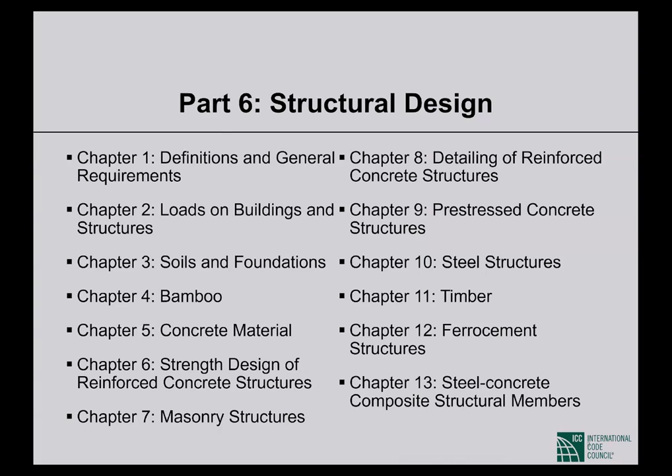So let's see what is there in chapter 1. There are many things, but I'll just emphasize a few topics. First, what is the definition of structure according to the building code? A structure is an assemblage of framing members and components arranged to support both gravity and lateral forces.

Basically, that part of a building, or a non-building structure, that carries the load is the structure. Building structures enclose a space and are used for various occupancies. When we have different types of occupancies, people may reside or use the building for different purposes.

That makes it a building, and the structure of a building is a building structure. Non-building structures, other than buildings, such as water tanks, bridges, communication towers, chimneys, etc., are non-building structures. Now, are non-building structures covered in the building code?

Yes and no. For example, even for the design of non-building structures, we use the building code to determine load, such as the seismic load. You use the zonation map even to design bridges or other non-building structures. And there are some tables related to wind load for non-building structures. So from that perspective, this is partly covered, but the details of design of non-building structures are not covered in the building code.

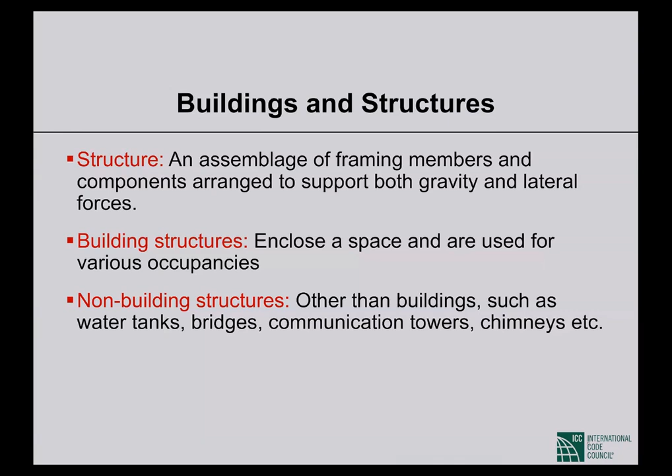Now, this is quite familiar to you. This is the occupancy. As I said yesterday, we categorize buildings in different ways. For structure, for the purpose of structural design, we categorize buildings in one way. For seismic design, we categorize buildings in a different way. For architectural purpose, we categorize in another way. For administrative purpose, we categorize. So there are different categorizations of buildings.

For structural design purpose, the most important categorization is this, although the name is very similar to the architectural categories. That is also called building categories on the basis of occupancy. And in structural design also, we call it occupancy category. Basically, this is risk category - how, if a building collapses, what might be the risk, what would be the consequence of the collapse. It is related to that, this structural occupancy category.

Now, you already know this, because it is similar to the old building code. The first one is low hazard to human life. That is, if a building collapses, if there is very little probability that human lives will be in danger, then that is low hazard. For example, a silo for storing grains, such as rice or sugar - so if it collapses, there will be economic loss, but there's very little chance that human lives will be in danger. So that is a low hazard building.

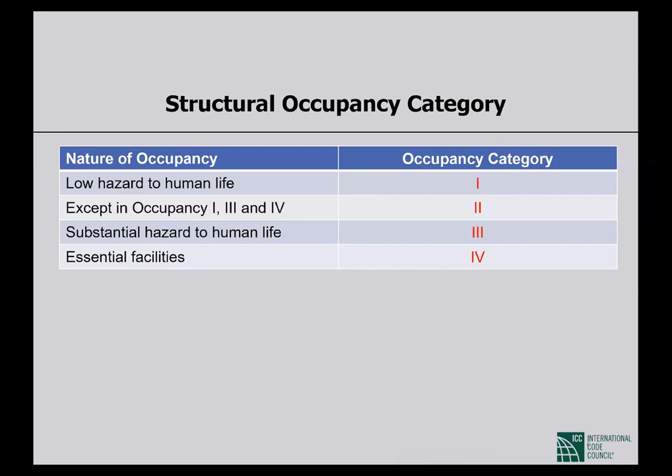Then what about the second category? All other buildings like residential buildings, office buildings, are called standard occupancy. They come in the second category. So I think most of you know about these categories.

So that is unchanged. Building basic structural systems - these are also mentioned in the previous version of the code too, but I found that many engineers are only familiar with the moment resisting frame system. They're not familiar with other systems. Now, actually, there are different structural systems.

The first one is very simple, the bearing wall system. That is like our old type brick buildings - the brick walls carry both gravity load and have a limited capacity to take lateral loads. Bearing wall system, but if it is properly designed, it is supposed to carry the lateral loads too. So bearing wall system, I think you are familiar with that.

Building frame system is interesting. Although the term frame is there, you may think that this is a beam column system. Yes, frame is there, but the typical beam column systems we are familiar with are actually moment resisting frame systems. So what is a building frame system? The frames, that is beam column frames, carry the gravity load only. The lateral load is completely carried by shear walls or bracings. So the shear walls or bracings are designed to carry the lateral load, and the beam column frames are designed to carry the gravity load. That kind of system is called building frame system.

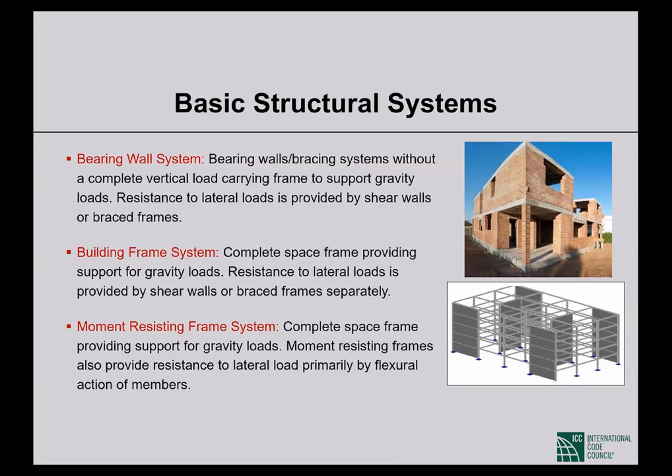So, okay, I have some animations.

We all know that the building code mentions 3 types of moment resisting frames: ordinary moment resisting frames, intermediate moment frames, and special moment frames. Most of you know about these classifications. These relate to detailing, that is how ductile the frame is, and what amount of inelastic deformation a frame can go through. Ordinary moment frames are not very ductile; they collapse after some deformation. Intermediate moment frames are somewhat more ductile than ordinary ones, and special moment frames are very ductile, so they can absorb a lot of energy during inelastic deformation.

We'll see some more details. Actually, Dr. Ghosh will give lectures precisely on these topics in later sessions in the coming weeks.

Dual system - I think many of you know about this. A dual system has both beam column frames and shear walls or bracings. The difference from a building frame system is that in a dual system, the beam column frames in a building also carry a portion of the lateral load, at least 25% of the lateral seismic load. If that is the case, we call that a dual system. There may be other special structural systems like tubular structures, tube in tube, and many other types termed special structural systems.

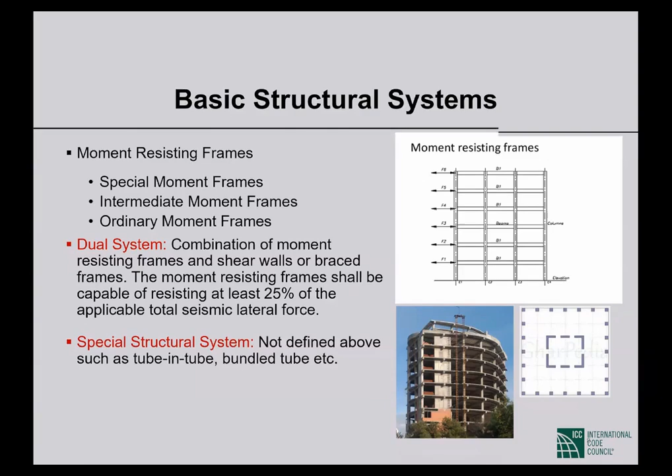Now, there is another very important aspect of structures: a building structure can be regular or irregular. Many things depend on this classification. So if we know what the irregularities are, then if a structure doesn't have these irregularities, it automatically becomes a regular structure. Now, what are the irregularities?

The irregularities are classified into two classes. One is called vertical irregularity, which we can see from elevations or elevational sections of a building. The other is seen from plan view, the top view of floors. If we find irregularity in floor plans, those are called plan irregularity or horizontal irregularity.

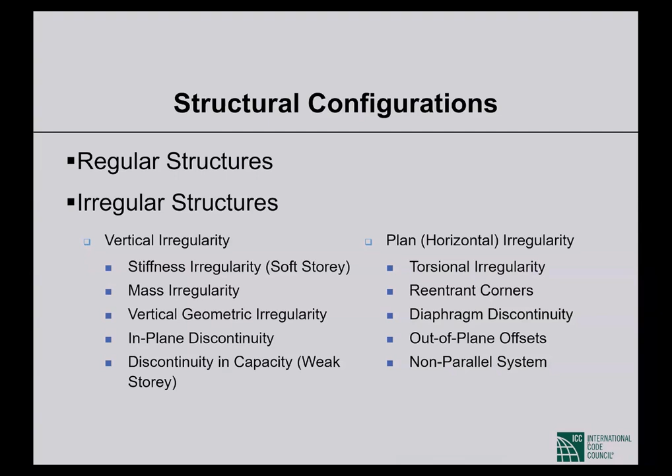Now let's see what the vertical irregularities are. There may be five types of vertical irregularities.

One is soft story - we quite often hear this term. Now, what is a soft story? This is related to stiffness. There are specific numbers like 70% or 80% - I'd encourage you to read the code for the exact number. If a floor's stiffness is much less than the stiffness of the adjacent floor, then that floor is called a soft story.

There are actually two types: soft story and extreme soft story. Not only is the adjacent floor compared, but adjacent two floors may be considered. We compare the story stiffness with the adjacent floor and the adjacent two stories. Please read the code for the exact definition.

What I want to show here is how a story can be less stiff than an adjacent story. One typical example is the parking floor or ground floor of an apartment building, where we don't have brick walls, whereas the upper stories do have brick walls. Brick walls are actually very stiff - they are quite weak in terms of strength, but quite stiff in terms of stiffness. So they may break quite easily, but it is difficult to deform them with a unit amount of force. That is the definition of stiffness.

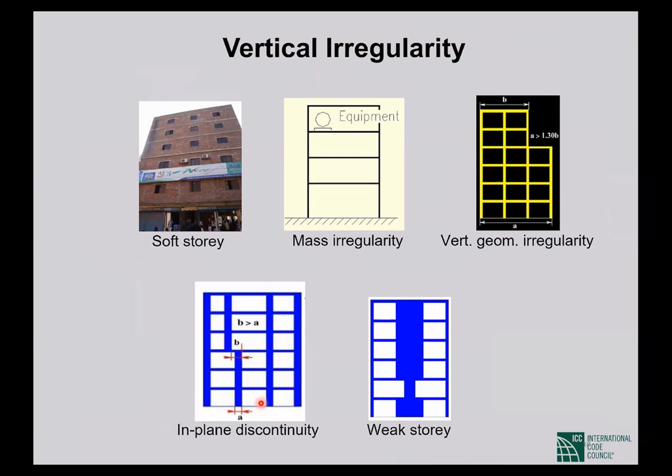So when the shifting is in a different elevation, this is called out of plane offset. And in the previous case, in-plane offset, you can see the shift in the same plane of elevation. So that is the difference.

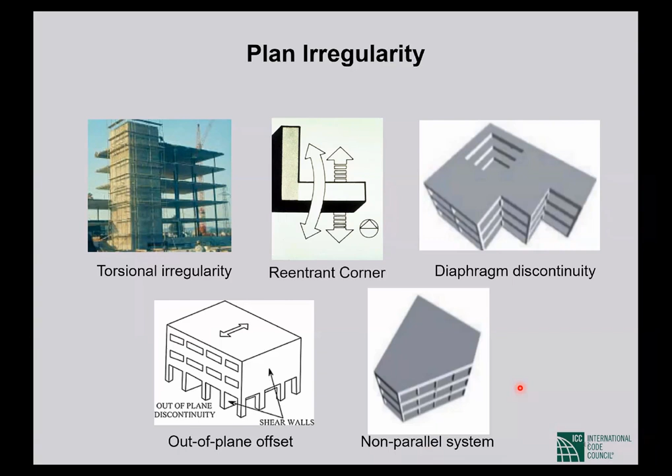So this is out of plane offset. And a non-parallel system, if the grids of frames are not parallel, then they're called a non-parallel system. So these are the irregularities that we have to be very careful about.

Now, why do you need them?

We'll see later. Now, another important topic included in chapter 1 is related to drift, allowable drift, serviceability. So the story drift that may be allowed depends, not for the seismic case, but for other types of loads. For all other types of load, we can allow this much inter-story drift, simply story drift. That is the drift between two floors divided by the story height. This much drift we can allow.

It depends, you can see, on the period of the structure. I hope you understand what we mean by the period of the structure.

I hope you all know about this, but still I want to mention that by the period of a structure, we mean that every structure has its own period or periods, every structure has a fundamental period. Fundamental period is that if a structure is, say, pulled in one direction, and if we remove the pull, then it vibrates. Then the time it takes to come back to its original position or to make one cycle is called the period of that structure. Very simply, if I pull a structure in one direction and remove the force and make it free, it vibrates without any force, goes to the other direction because of vibration and comes back, and the time required to make one cycle is called the period of the structure.

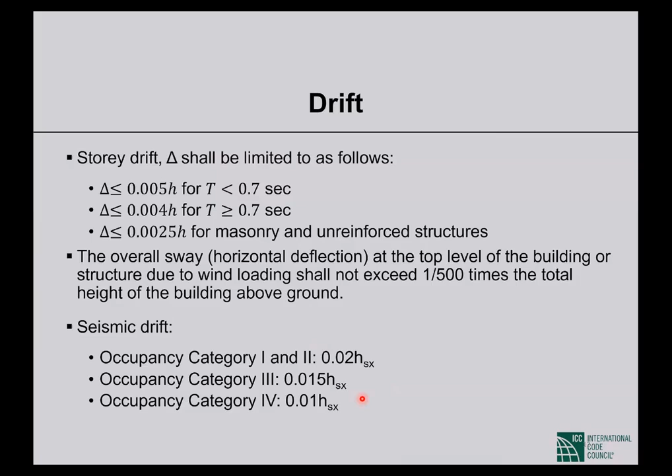Now, this is something that is quite often overlooked. That is in this chapter, chapter 1. It is related to design documents - when we submit a drawing for approval, what are the documents we are supposed to submit? In case of Rajuk and other development authorities, they follow the building construction rules, like Imarat Nirman Vidhimala. So in the Vidhimala, there are prescriptions for what has to be submitted. But according to the code, these documents have to be submitted.

So those in the PWD and Rajuk, I plead to you, please show this to the Imarat Nirman Vidhimala committee, so the rules in the Imarat Nirman Vidhimala do not conflict with the building code. The documents that are supposed to be submitted during submission should be similar, both in the building code and Imarat Nirman Vidhimala.

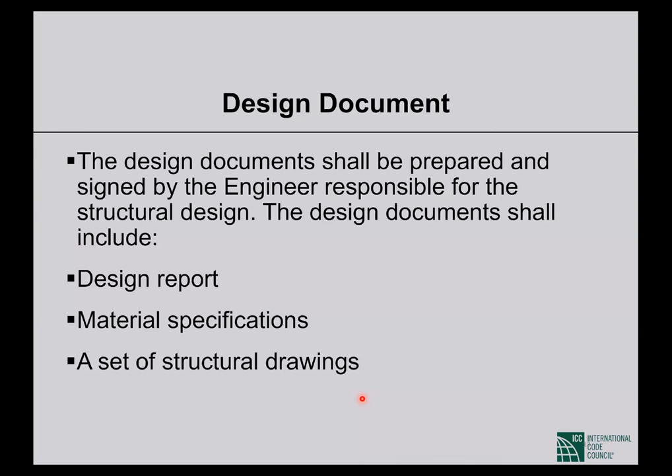So what are the documents that are supposed to be submitted? A design report, material specifications, structural drawings, mention of BNBC - for example, now it has to be BNBC 2020 - name of other reference standards, a drawing of the complete mathematical model. What do you understand by this?

Let me give an example. In order to understand the effect of the soft story building, we need to model the brick infill walls. So how can we model? We can model it in many different ways. For example, we can model it as struts. If we do that, then in the drawing of the mathematical model, the brick walls should be shown as struts instead of walls. So that is the mathematical model.

Methods of structural analysis and results of the analysis. There are different methods of structural analysis. We'll see, for example, to consider earthquake loading, what are the different methods of analysis. So which method of analysis is followed should be mentioned, and results of the analysis.

Methods of structural design, including types and strength of the materials of construction, reference of the soil report, statement supporting the validity of the above design documents with date and signature of the engineer responsible for the structural design. So it must be an enlisted engineer who can sign.

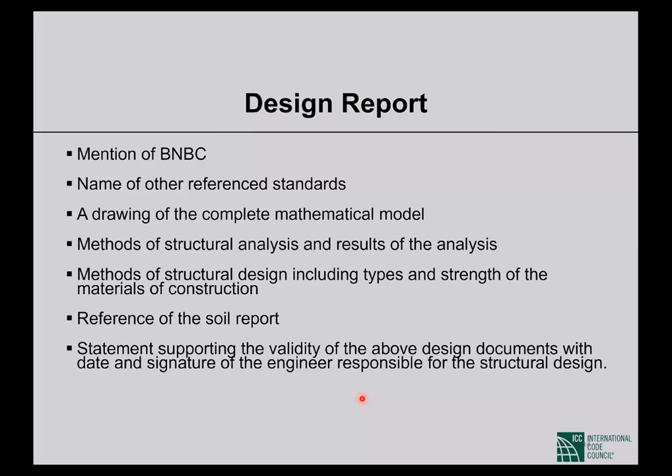In addition to that, in the structural drawings, what should be there? It is mentioned sheet by sheet, what should be there in the first sheet, what should be there in the second sheet. That is interesting. So we should all follow these guidelines.

In the first sheet: identification of the project, reference to the design report, date of completion of design, identification and signature with date of the engineer responsible for the structural design.

The second sheet shall contain material specifications, specified compressive strength of concrete at stated ages. For example, we need the 7-day strength of concrete so that we can decide if we can remove the props or not, things like that. Or in case of pre-stressed concrete, that is very important, when we can jack the concrete.

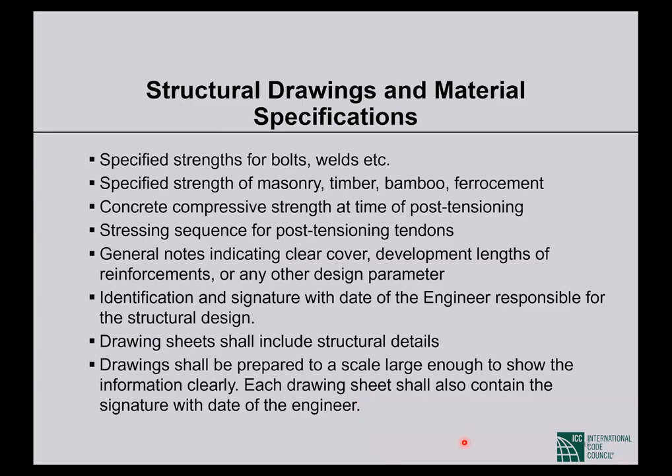And then drawing sheets shall include structural details. Drawings shall be prepared to a scale large enough to show the information clearly. Each drawing sheet shall also contain the signature with date of the engineer. So this is quite detailed, all the information, and we should follow these guidelines.

So that was all about chapter 1. I took a lot of time covering chapter 1, but I think this chapter is very important, though it is not read widely. But this is very important - there are many more important pieces of information in that chapter.

Please read that chapter carefully. Chapter 2, loads on buildings and structures. This is one thing that we are very familiar with.

So what are the loads? Dead loads, live loads, wind loads, earthquake loads, and miscellaneous loads. Miscellaneous loads like rain loads. Do you really calculate rain loads? Please check what the code says. Loads due to flood and surge. Do you consider that? If you're designing a structure in the coastal areas, you should. And please read the code, how to calculate these loads.

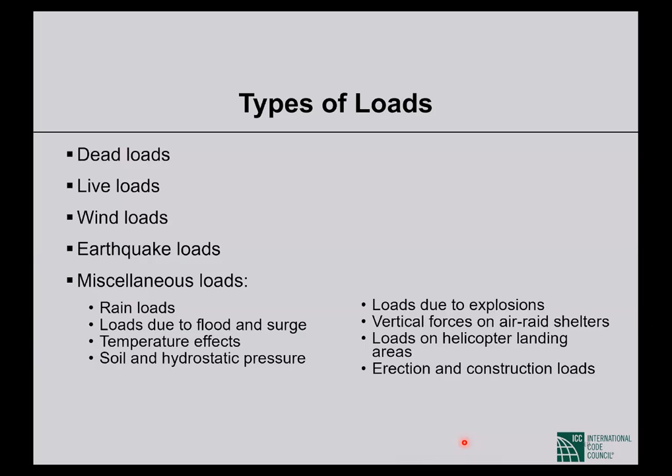Temperature effects, soil and hydrostatic pressure, loads due to explosions, vertical forces on air raid shelters, loads on helicopter landing areas, erection and construction loads. So these are the most frequently used ones: dead loads, live loads, wind loads, and earthquake loads.

Let's see them. Live loads. We know that in the previous version of the building code, there was a table mentioning loads for each type of occupancy. By occupancy type, I refer to the architectural classification of occupancy, for example, residential building, institutional building, or industrial building. For those occupancy types, the recommended live loads were mentioned in the previous version of the code.

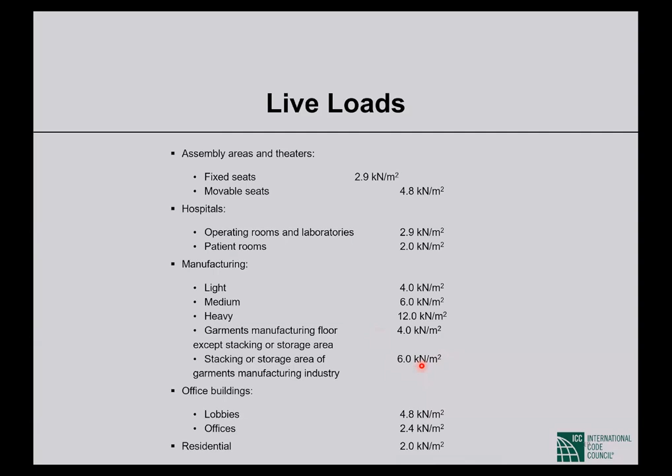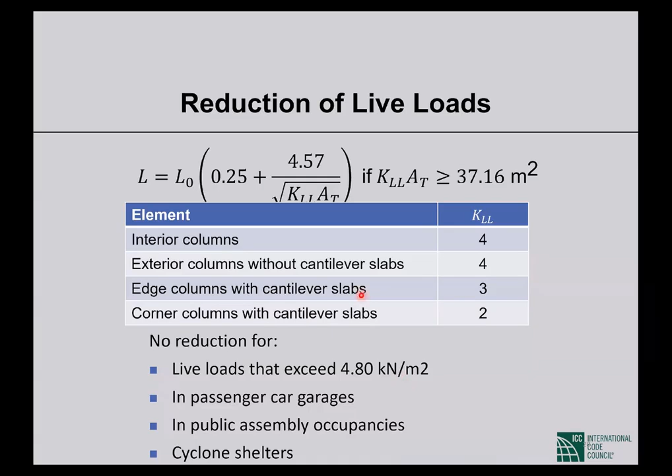Reduction of live loads, I think you know about this. I think this was there in the previous code too, but it still depends on the tributary area. I think this is automatically taken care of by many software, but still, if the tributary area of live load is above a certain value, then you can reduce the live load. So these are the clauses. But if the recommended live load is more than 4.8 kilonewton per meter square, you are not allowed to reduce live load. Things like that.

Wind load. Okay, wind load, the procedure has been changed completely. In the previous version, it was different, a bit simpler, much simpler than the present version. The present version of BNBC follows exactly ASCE 7-05. So all the steps are absolutely similar to ASCE 7-05. That is an advantage for design engineers, that you can blindly use the available software. You have to just select for load calculation ASCE 7-05 code in the drop-down menu of your software. That will take care of everything, but you have to be aware of the steps and many details.

So these are the steps: the basic wind speed and wind directionality factor. You have to first determine these, then importance factor, which depends on occupancy, exposure category. It was there in the previous code, but it was much simpler. Now, first you have to identify surface roughness in different directions, and from surface roughness, you have to understand the exposure category. So it has become a little bit different.

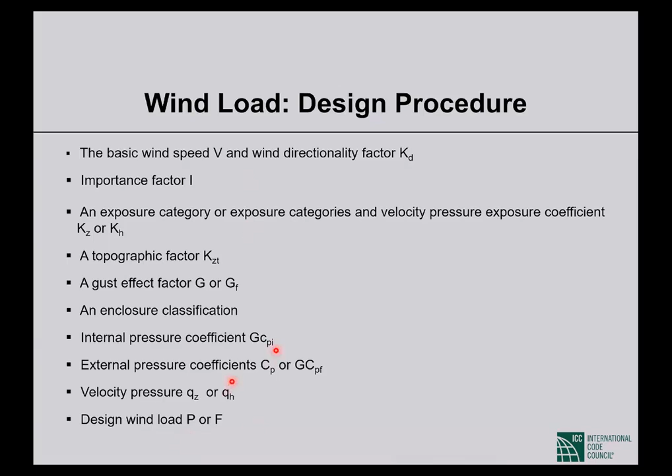External pressure coefficients were also there, so these should be familiar to you. There are a lot of tables from which you can determine these quantities - velocity, pressure - the formula is different. Now this form to calculate pressure, all these factors will be needed. And once you calculate the pressure, then from the area you can calculate the force. So basically there are many different factors you have to calculate this time.

The most important one is the basic wind speed. So the basic wind speed map, if you compare with the earlier version of the code, you'll see those two maps look exactly the same. The values are different. Why is it so?

Actually, no new calculations were done this time because the code in the previous version was quite conservative. Even with the latest data, the actual speed that we can derive to calculate wind load is not that conservative. So we became conservative and we followed the previous version of the code.

So the contours and everything is similar. Well, then why are the values different? First of all, the unit is different. In the previous version, it was kilometers per hour, and in this version, it is meters per second. But if you directly convert from kilometers per hour to meters per second, you will not get the same values because there is another conversion.

In the previous version of the code, that was based on fastest mile wind speed, a different method of measuring wind speed. And this time, this is 3-second gust wind speed. So the basic method of measurement is different, so there is a conversion for that. ASCE 7-05 follows 3-second gust wind speed, and our previous version of the code followed fastest mile wind speed. So we needed a conversion for that. That's why the values are different, but the contours are the same.

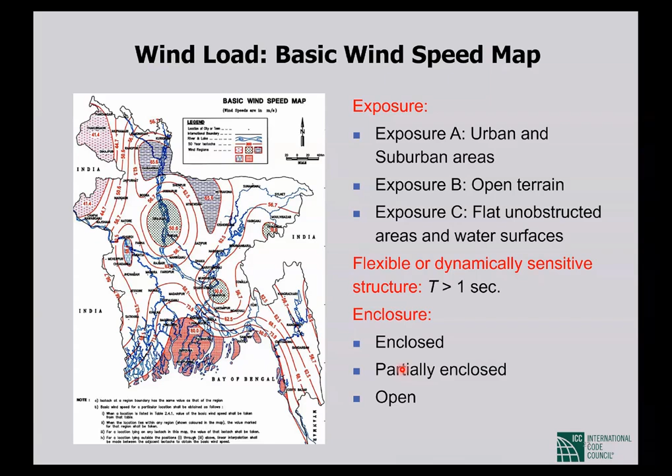Now, let's talk about earthquake load. Again, it is different this time. The method is completely different from the previous version of the code. But unlike the wind load, this is not exactly similar to ASCE 7-05. There are some differences, but at the same time, there are ways where we can just simply use the software the similar way - just choose ASCE 7. So those shortcuts are given also in the code.

Before going to the earthquake load, the very important classification - site class - is different this time. Previously, in the previous version of the code, there were 4 site classes: S1, S2, S3, and S4. This time, it is different. This time, there are 7 classes: SA, SB, SC, SD, SE, and S1, S2.

SA is rock, SB is very dense sand or very stiff clay, SC is medium, SD is loose, SE is SC or SD underlain by stiffer material - that is, if the difference of soil strength is abrupt. In that case, S1 is if the soil is plastic soil, if the plasticity index is very high.

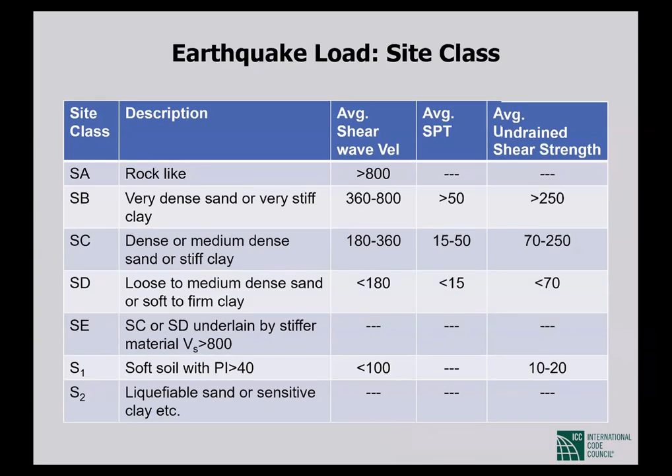There are other different methods of testing that we can employ to determine shear velocity. Or from laboratory tests we can determine undrained shear strength and classify the soil. So that's it. Average - what do you mean by average? 30-meter average, this means actually 30 meters, 100 feet. This is the average of 30 meters. Anyway, now that was site classification.

The most important factor that we need to calculate earthquake load is the zonation map, zone coefficient.

Zone coefficient - in the previous version of the code, Bangladesh was classified into 3 different zones, zone 1, 2, 3. Zone 1 was the southwest part of the country, comprising Kushtia, Jessore, Khulna, Satkhira, Bagerhat, Barisal, Faridpur, Noakhali. Zone 2 was Dinajpur, some part of Rangpur, Rajshahi, Bogura, Dhaka, Kumilla, Chittagong, and Chittagong Hill Tracts. Zone 3 was the northeastern part - Kurigram, Sherpur, Rangpur, Mymensingh, and Greater Sylhet. So this part was zone 3, and the zone coefficients were different.

This time it is changed. Bangladesh is now divided into 4 seismic zones: Zone 1, Zone 2, Zone 3, and Zone 4. Zone 1 is similar to Zone 1 of the previous version, but a small part of the old Zone 1, the southern Satkhira, Khulna, and Bagerhat part, is this time Zone 2. So zone 2 exists in two separate, disjoint areas.

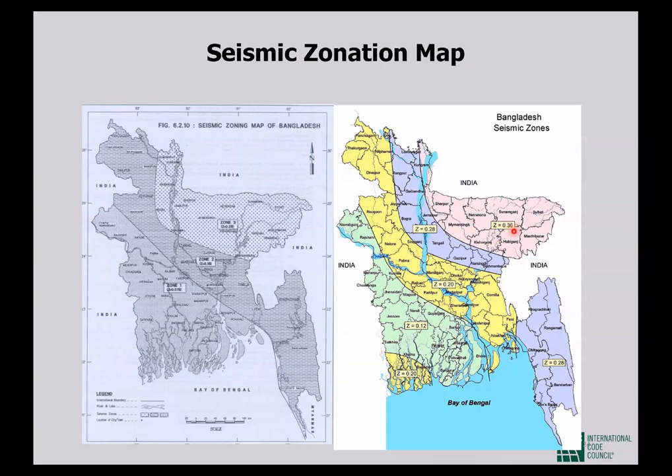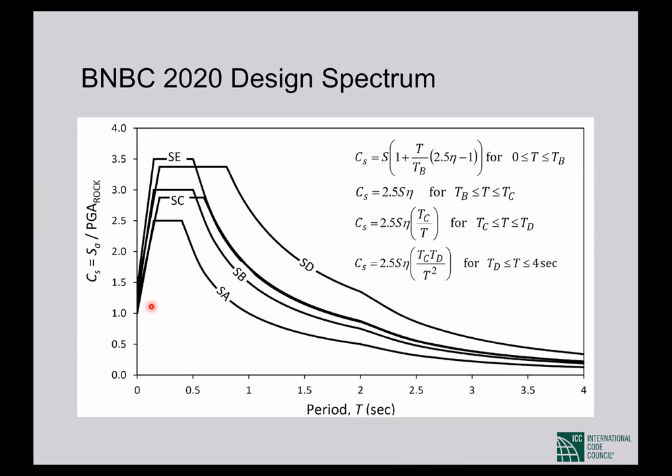considering the properties of soil, site class, and the building parameter, like the period of the building. So if we know the period of our building, and if we know the site class, then we can calculate the acceleration. Using this, multiplied by the PGA rock, that is another thing. These accelerations are actually for if the soil is rock, then it is supposed that this amount of acceleration will happen. And the properties of the topsoil are taken care of here. So we'll have to multiply this value with the Z value, and then we'll get the acceleration.

Now this is very important, seismic design category. This is a new concept. Previously, in the previous version of the code, we were free to choose if we could design a structure as an ordinary moment frame, an intermediate moment frame, or a special moment frame. What we used to do, if we considered a structure to be a special moment frame, then we would reduce the load using a greater R value. That's all. But there was no restriction on whether we could use ordinary, intermediate, or special moment frame.

Last time there were some restrictions based on zone, but now the restrictions are based on zone, site class, and occupancy category. For occupancy categories 1, 2, and 3, this is the table. But for occupancy category 4, there is another table, an extension of this table, but I've omitted that to make it simple.

So, for example, let's talk about Dhaka. Dhaka belongs to zone 2. Now, there are 3 seismic design categories, B, C, D. Why does it start from B? Because in the SDC there is another category A, which is not applicable for our case. So we have maintained consistency in the definition of categories B, C, D, but we omitted A because that is not applicable in our case. That's why it starts from B.

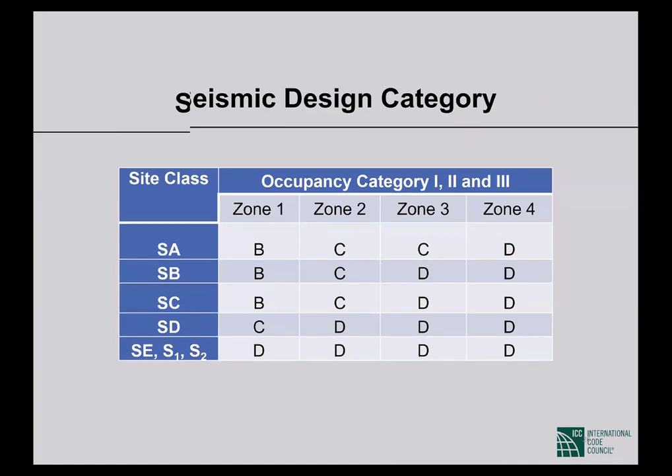So that's a simple way of saying this, but you have to read the code to understand it properly, how to make a structure SDC B, C, D.

Now, there are height limits too. For example, in case of special steel moment frames, intermediate steel moment frames, there are limits.

Let's see seismic design category D. Ordinary moment frame is not permitted. Intermediate moment frame, for concrete, is not permitted. So you understand, that's why I said design category D corresponds to special moment frame. So there is no height limit for design category D if we construct a special moment concrete moment frame.

In case of steel, ordinary is not permitted. Intermediate, you can use intermediate steel moment frames, but there is a height limit of 35 meters. And special moment frames, there is no limit. So this is like this.

Seismic design category C, you cannot make an OMF, that is not permitted for SDC C, but there is no limit for IMF or SMF. So that's why I said it corresponds to IMF, but there is no restriction on building SMF for seismic design category C. And B is, there is no limit for ordinary moment frames.

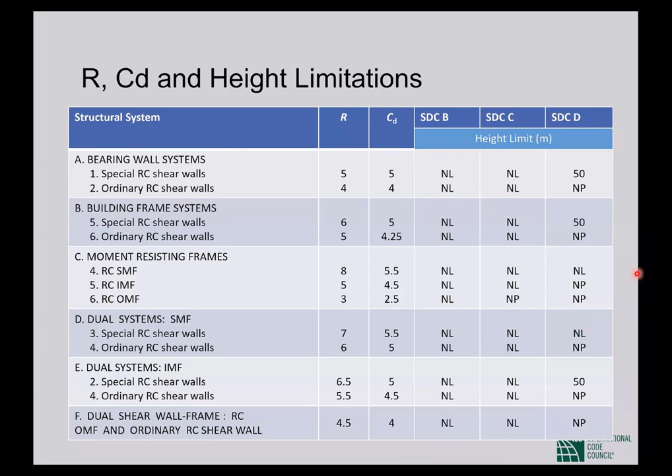So one thing now you can appreciate is that design categories are related to building systems, structural systems, and their height limits, but there are many more that we'll see.

Now, another important thing is the method of analysis. For earthquake loading, what method of analysis can we adopt? We are used to applying equivalent static load method, but this time, and in the previous code also, there were restrictions, but this time the restrictions are much more strict.

For regular buildings in zones 2, 3, and 4, if the height of the building is more than 40 meters, like 13-story and above, you have to adopt a dynamic analysis method. You can no more use equivalent static load method. In zone 1, the limit is 90 meters, like 30-story or above. So you see in Dhaka, Chittagong, Sylhet, for a regular building, if there are no irregularities, only in that case, if the height of the building is less than 40 meters, then you can use equivalent static method. Otherwise, you have to use dynamic analysis method.

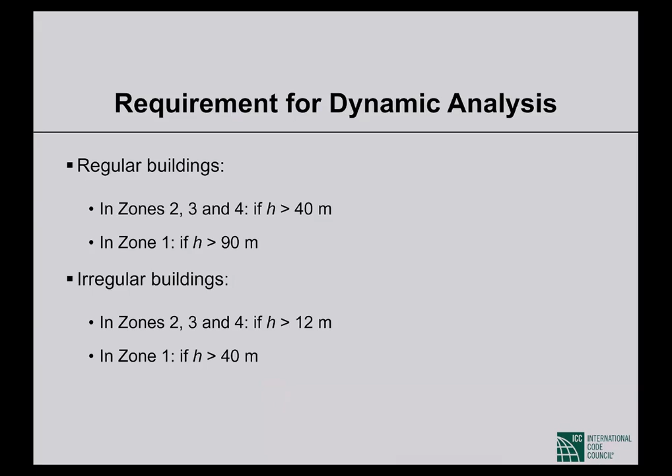I emphasize that design engineers be prepared, be ready to use dynamic analysis. You may think it shouldn't be that difficult, the software will take care of that, but that is not the case. You have to understand the dynamics, structural dynamics, if you want to really be efficient in design, if you really understand what's happening. So I would suggest every one of you should study structural dynamics and be confident in using dynamic analysis.

The other considerations that are important for loading, this is seismic weight.

In the previous version of the code, dead load, permanent dead load was the seismic weight. In case of storage or warehouses, we would consider some portion of live load and add that with dead load as seismic weight. But this time we have to consider some part of live load as seismic weight. If the recommended live load is less than 3 kilonewton per meter square, like 60 psf, then dead load and 25% of the live load will be considered as seismic weight. If the recommended live load is more than 3 kilonewton per meter square, then 50% of the live load should be added with the dead load.

Now, the other points, like if the building has horizontal torsional moments, we have to calculate that for lateral load. If there is torsion, we can calculate the average deformation of a story, the lateral deformation of a story, and the maximum lateral deformation of a story, and from those values we can determine if there is a torsional moment or not that we need to consider. Then we have to take that into consideration in our calculations, like we need to magnify the moments. So these things are very important that we all should be conversant with.

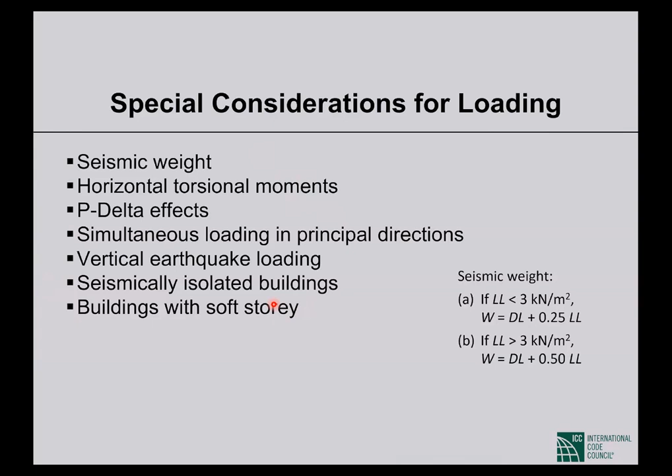If I go into this, I think Dr. Ghosh will go into the details of these things in later sessions.

Now, seismic detailing, this is chapter 8 actually of part 6. This is very important. As I said, loading chapter 2, concrete design, reinforced concrete design chapter 6, and chapter 8 detailing—these are interrelated chapters. In chapter 8, there are provisions for ordinary detailing, not seismic detailing, from section 8.1 to 8.2, related to hooks and other things. That is applicable for all types of loading. For earthquake loading, seismic cases, the sections from 8.3.3 to 8.3.10 are related to seismic detailing.

Now here you see the detailing, the way how we are going to design the ties or spirals, confinements of a column, or how we are going to design the stirrups of a beam, what should be the lap length, or what should be the anchorage, things like that. The detailings and the hooks, the details of the hooks mentioned in these sections are related to seismic design category.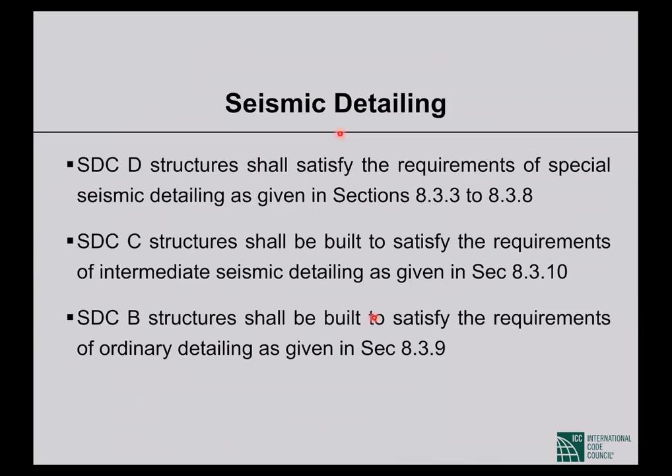Okay, Dr. Ghosh will explain in detail about these detailings in relevant sessions.

Load combination, as you can see, is completely different from the previous version. The overload factors are much smaller than the previous version. So that is another important difference, and this is according to ASCE 7-05. ASCE 7-05 has been followed here.

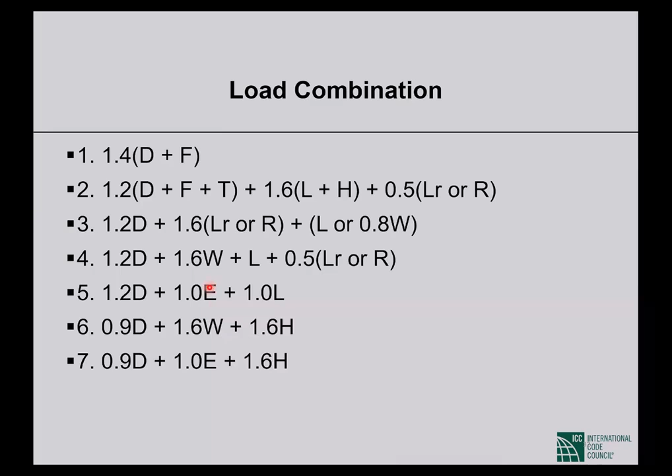One important point that I want to make: you see the overload factor of E is 1. It was 1.75 into 1.7 in the previous version. But in this version, this is simply 1. That is, no overloading is needed because the design basis earthquake, DBE, for which we design a structure, is kind of an ultimate load condition. So we don't need to overload that value. That is important.

Okay, sorry. Now, let's talk a little about chapter 3, but there will be separate sessions on geotechnical engineering, two sessions actually. One will be offered by Professor Zoynul Abedin, who was the team leader of the building code updating project, and another will be offered by Professor Mehdi Ahmed Ansari.

He was at the steering committee, as a steering committee member of the building code updating project. Now, I don't know, should I mention these things? Maybe I should skip because I think it depends on how much time you have left for part 7. Yeah, I think this will be covered by Professor Abedin and Professor Ansari.

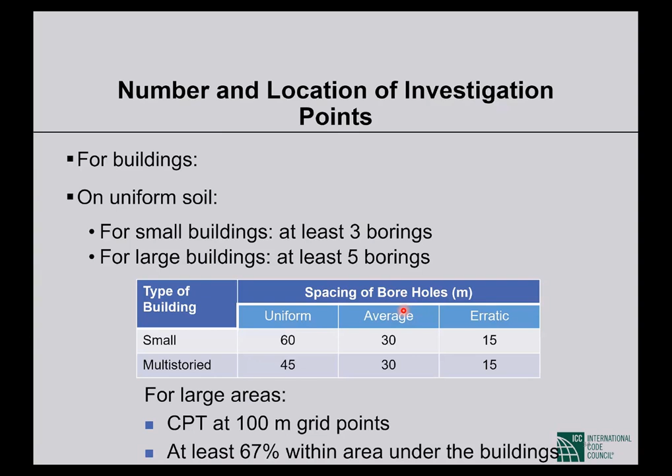So I would prefer to skip these slides, but I just want to give the information about how many boreholes should be done at a specific site. You can get some idea, guidelines from the code, things like that. And minimum dimension of footings, things like that.

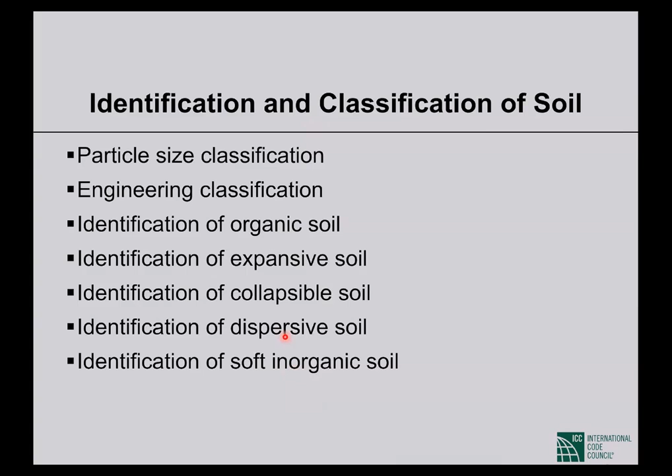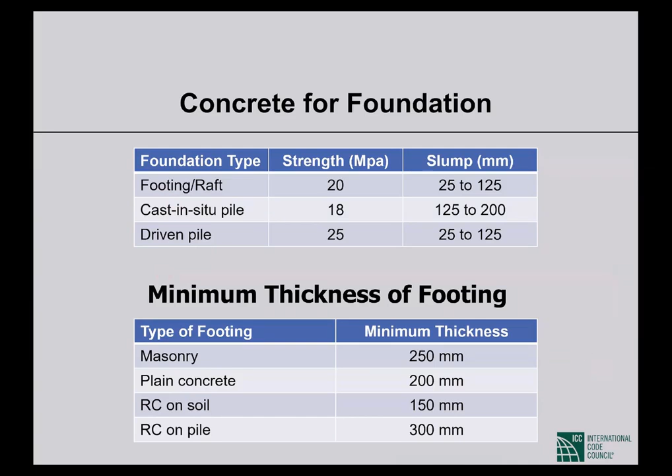Classification and identification of soil, information regarding these things are there. So what should be the minimum strength of concrete and value of slump, workability for different types of foundations? Minimum thickness of footing - I think you shouldn't stick to these. Actually, you have to calculate the thickness.

So that's it. Chapter 3 has a lot of things, and a number of appendices are there which are related to chapter 3. So that will be covered by Professor Abedin and Professor Ansari.

Bamboo structures, this is a new addition. This is basically taken from the Indian Building Code, but some information related to local species of bamboo are included in this chapter, and that information was collected from Bangladesh Forest Research Institute, BFRI. So both in the bamboo chapter and timber chapter, there are informations about local species, and BFRI did a lot of research on local species.

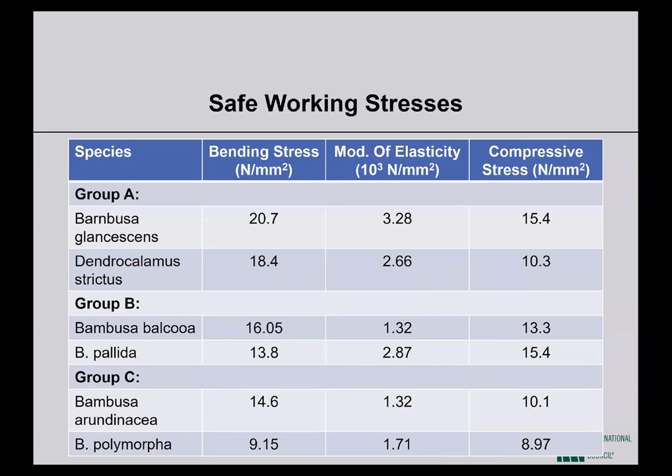So these information are from BFRI. You can find allowable stresses, information regarding modulus of elasticity, allowable compressive strength, bending stress - these for different types of species. And the species are grouped in different groups, and subsequent calculations depend on what group a particular species belongs to, and other things.

Concrete material, this chapter is basically exactly the same as compared to the previous version of the code. I will still like to mention some issues. This is a very commonly asked question: how many sets of cylinders should we collect for testing? So, frequency of testing.

This is given there. At least once, this is from ACI 318, at least one set once a day if you're casting in the whole day. You have to take at least one set of cylinders for 60 meter cube of concrete. If you're casting more than 60 meter cube of concrete, you have to take more sets of samples. And if the surface area is more than 250 meters square, then you have to take more sets of samples.

For a project, there should be at least 3 sets of cylinders, and 3 cylinders make 1 set. If total volume is less than 20 meter cube, then no test is required. One set means, in ASTM, three cylinders make one set, but according to ACI, it is 2 cylinders make one set, depending on the size.

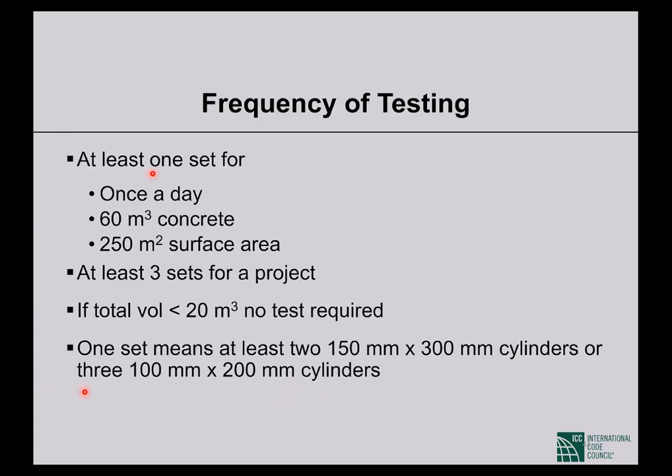If it is like 6 inch by 12 inch, then 2 cylinders. If it is like 4 inch by 8 inch, then 3. So this is very important for those who are supervising construction.

And this is another quite frequently asked question: if the test result is less than the design strength, should we demolish the structure? What is the acceptance criteria?

For samples which are cured in the lab, you have to understand, you'll collect this cylinder in the field and send the cylinder to the lab. That will be cured in a tub in the laboratory, so completely immersed, fully cured. So if the samples are cured in the lab, then the average of 3 sets must be greater than FC prime.

But average of 1 set may be less than FC prime, but not less than FC prime minus 3.5 megapascal. Suppose your design strength is 21 megapascal, and you are getting average of 1 set of 18 megapascal. Is that okay or not? That is okay, no problem, because that is within this limit. But average of 3 sets must be greater than FC prime. This should be clearly understood.

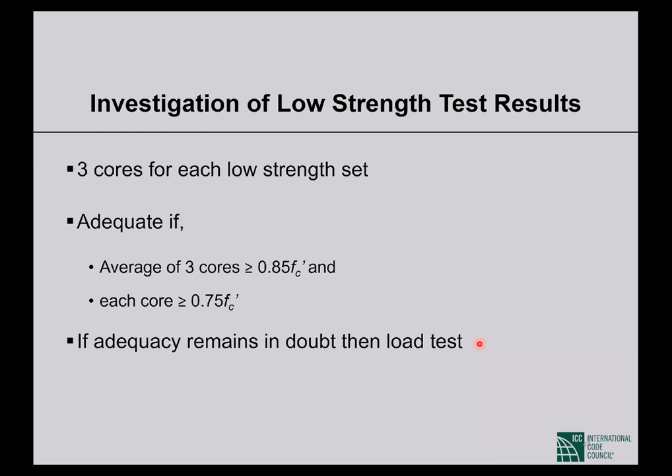Regarding chapter 6, strength design of reinforced concrete structures—oh, I forgot to mention, in chapter 5, concrete materials, all the things are similar to the previous version except one. In this version, there is mention of shotcrete, a different type of concrete application. You literally shoot, using a pipe, concrete onto the surface of, say, a wall, and by that way you prepare a concrete wall. So that is called shotcrete. There is a section on shotcrete in this chapter; that is a new addition.

Chapter 6, strength design of reinforced concrete structures.

I think this will be covered by Dr. Ghosh. So the topics that are mentioned in this chapter are these.

Basically the topics, the titles are similar to the previous version, but the formula and the contents are different. This time it is completely similar to ACI 318-08, except the stairs. Stairs are similar to our previous version of the building code.

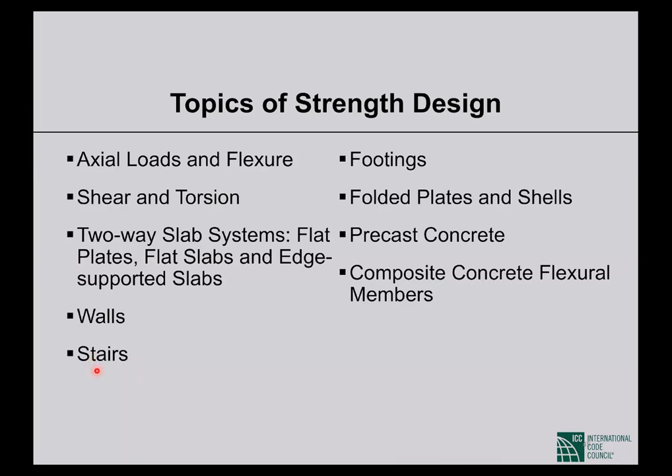Not completely similar though. There's some new additions even in the design of stairs. Some tables have been added.

Chapter 7, masonry structures. So masonry structures are more or less similar to the previous version. These are the classifications of masonry.

It depends on the cement sand ratio and the compressive strength. Now, how can we measure the compressive strength of masonry?

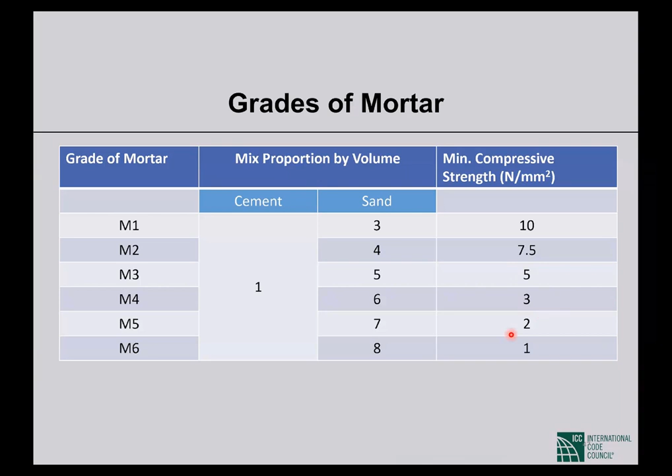This is mortar, sorry, grades of mortar. So we can make a mortar cube and do compressive testing and measure it. Based on that, we can define the mortar grade. And this is important for masonry.

To design a masonry structure, we need to know FM, that is compressive strength of masonry unit. So to determine that value, we can make units of masonry like this.

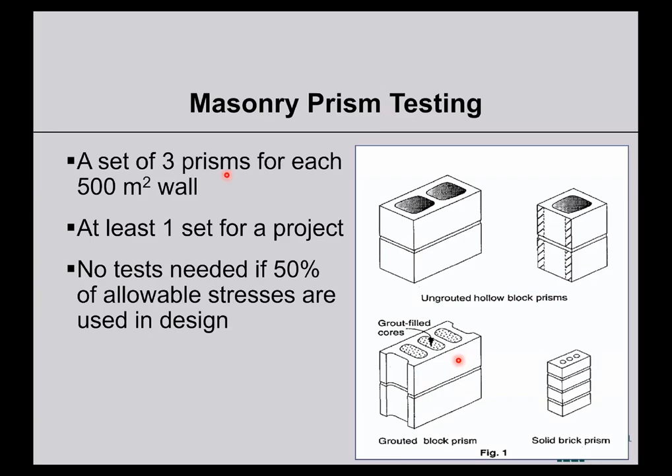Multiple bricks are arranged with mortar joints in this type of column. They are called masonry units with 3 or 5 brick units, and then we do compressive testing. This is called prism testing. From that we can calculate FM prime and do the design.

Now earthquake resistant design, okay, this is important for masonry. Two types of masonry structures are mentioned in the code. One is unreinforced masonry or URM, another is reinforced masonry or RM.

Unreinforced masonry is not allowed. It's written here: for seismic zones 2, 3, and 4, unreinforced masonry is not allowed. Reinforced masonry, but do you see quite often reinforced masonry where steel reinforcement is used inside bricks? You don't see, right? So RM is basically non-existent in Bangladesh.

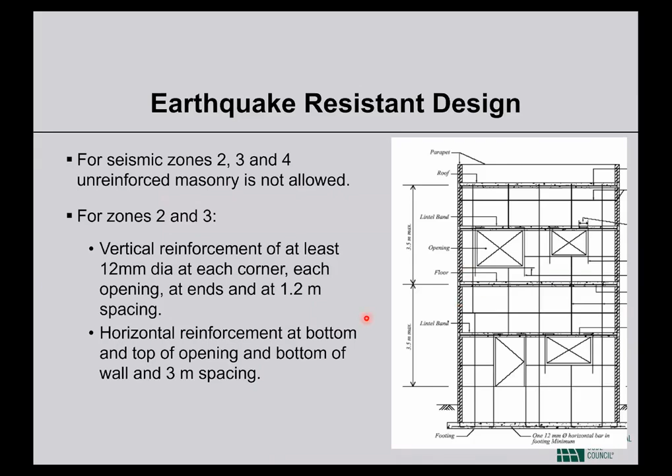But URM, that is the most commonly used method of masonry construction, is actually forbidden this time for zones 2, 3, and 4. Only in zone 1 is that allowed. For zones 2 and 3, there are requirements for reinforced masonry. For zone 4, this is more stringent. So please check these. If you really want to construct a masonry structure, you have to go for reinforced masonry.

This is a new topic that has been added to the masonry chapter in this code, that is called confined masonry. Confined masonry is actually quite popular in Latin American countries and in other earthquake-prone countries like Iran. Actually, in the Iranian building code, that is included in the building code.

This is similar to the way we used to construct boundary walls. The brick walls are first made, keeping a void in the location where we want to pour some concrete, and it has got a foundation. And here we provide some reinforcement and we pour concrete.

So this is somewhat similar to a column, but this is not a column. This is called confinement. That's why, since we provide confinement in between these brick walls, this is called confined masonry. So the behavior is completely different from a beam column frame in the confined masonry. These vertical members provide confinement.

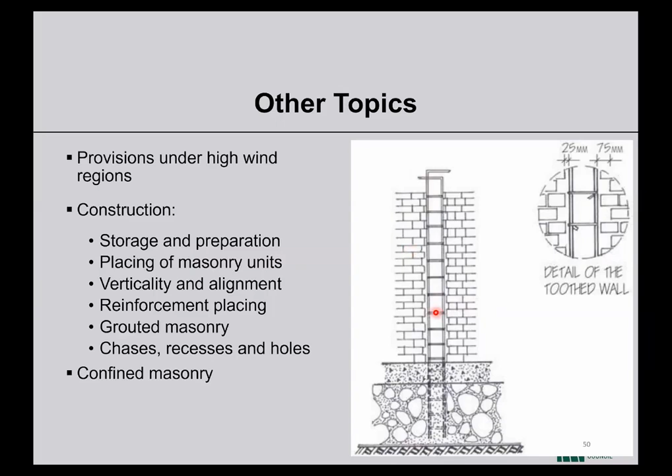They don't actually carry the lateral load. The lateral load is carried by the walls, the brick walls. So that is the basic difference. So all the details regarding this confined masonry are mentioned in this chapter of masonry structures in the building code of Part 6.

Chapter 8, detailing of reinforcement in concrete structures. I think Dr. Ghosh will cover these, and I have mentioned some sections which you have to follow to design according to SDC B, C, or D. So these are the topics that are covered in this detailing chapter.

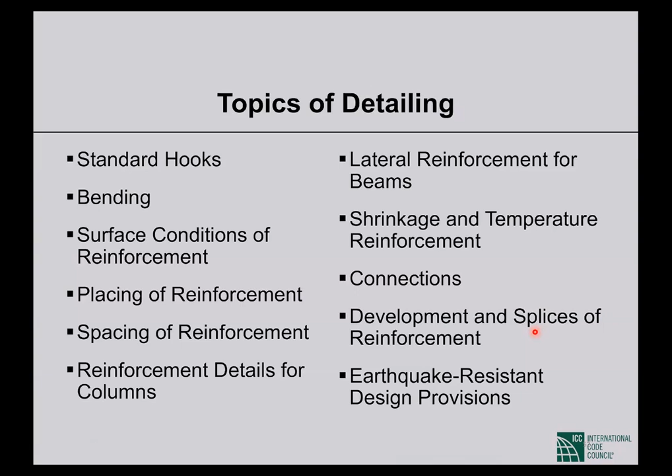So all of them are very, very important. Please go through them if you want to design a structure really appropriately. For earthquake resistant design, as I said, if you want to build a structure according to seismic design category B, please follow section 8.3.9.

This is mainly related to column ties and hooks. So for seismic design category C, this corresponds to IMF, and section 8.3.10 is the section that you have to follow if you want to design according to SDC C. The provisions are mostly related to beams, columns, and flat slabs.

So the tie spacing, the stirrup spacing, etc., etc. These are mentioned in this section.

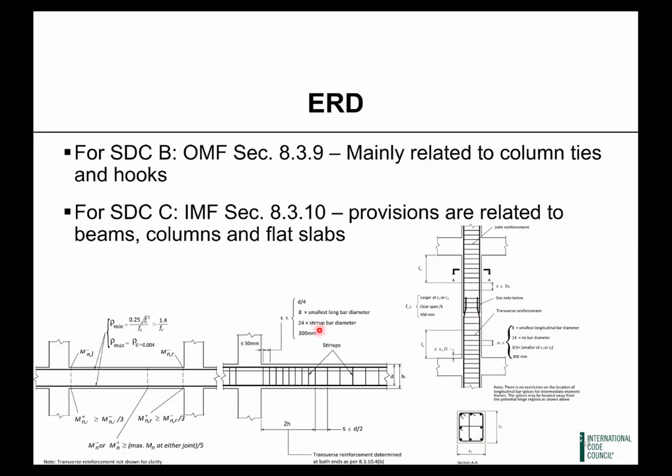For seismic design category D, you have to follow sections 8.3.3 to 8.3.8. This is mainly related to special moment frame.

This is important: no flat slab construction is allowed for SDC D type building. No flat slab is allowed, that is column supported slab. You have to provide beams.

For moment frame structures, moment resistant frame type of buildings, things are one way. For other types of buildings like dual system, things are different. But in general, no flat slab is allowed.

FC prime, concrete strength, 28-day concrete strength must be more than 21 megapascal or 3000 psi. The ratio of ultimate strength and yield stress of reinforcing bars must be more than 1.25, which is actually ductility class D, according to BDS EN, BDS ISO, ductility class D.

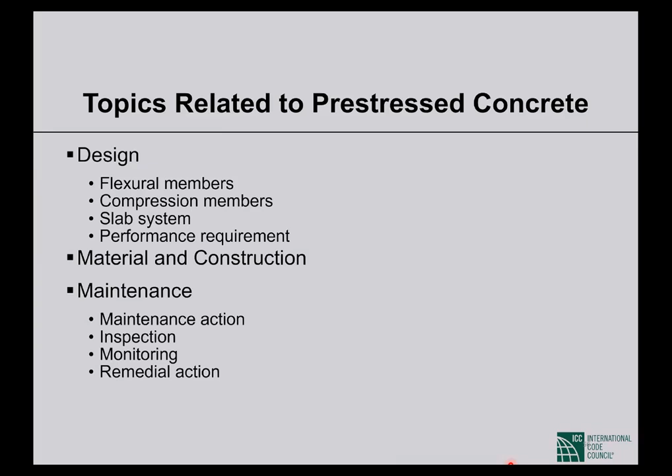Pre-stressed concrete structures - this is basically similar to the previous code, but it is rearranged. The sections are rearranged in a different way. So I won't go into the detail of these.

Steel structures - there will be separate sessions on these. The topics are these, a very extensive chapter. This is important - seismic provisions for structural steel buildings. This is something new - structural design for fire conditions. This is also new - design for fatigue. These topics are completely new, and there are many more details included in this version of the code.

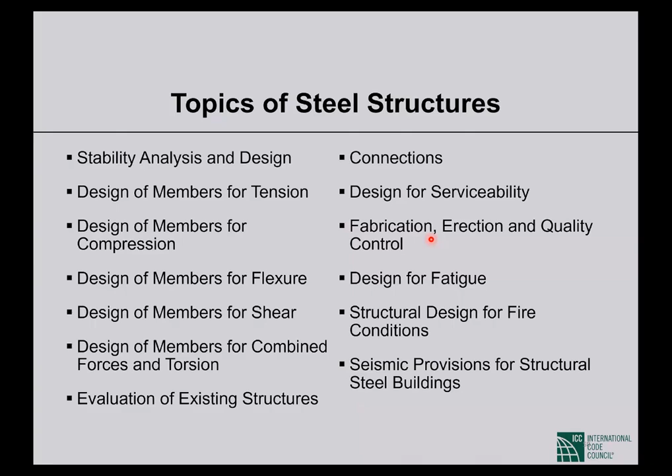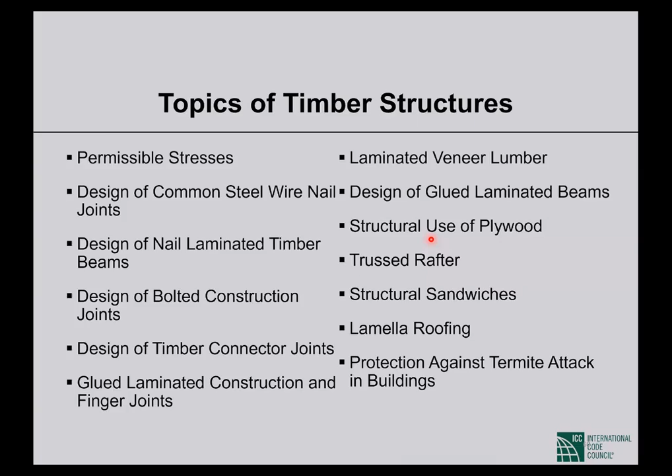Timber structures, basically similar to the previous one, but locally some information is taken from BFRI, Bangladesh Forest Research Institute. So there are some new additions. Ferrocement structures is exactly similar to the previous version, but the arrangement is somewhat new. I'm just skipping these.

Steel, concrete, composite structural members - oh, I don't have time for construction practices, sorry. Steel, concrete, composite, structural members - this is a new chapter.

We are quite used to designing composite slabs, right, using steel profile and a very thin concrete slab. That is a kind of concrete composite member, but there are others, even composite columns, composite beams, and the connections. These details are there, even the seismic provisions for composite structural systems.

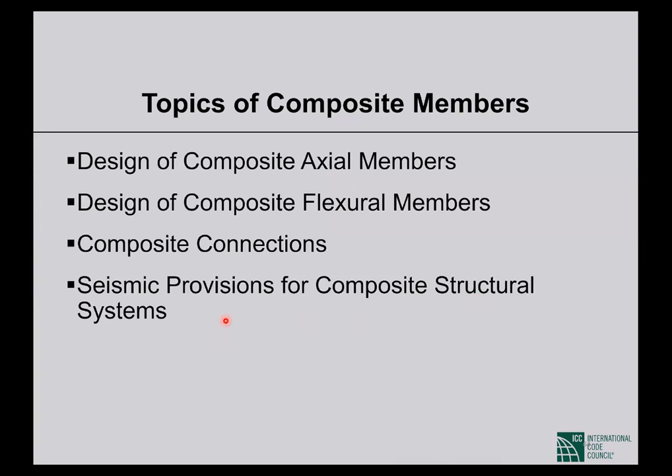Now, I used up probably all my time describing part 6, so I have very little time for part 7. Still, let's see what's there. There are 5 chapters, I mentioned them previously.

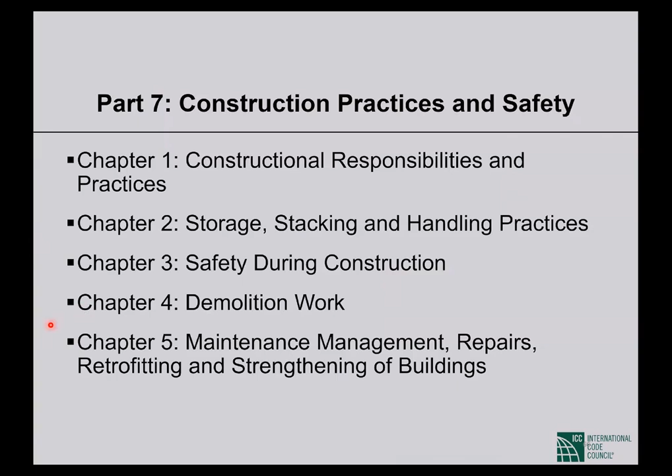Most of the chapters are related to safety. The second chapter is related to storage and handling, and the fourth chapter is related to demolition work.

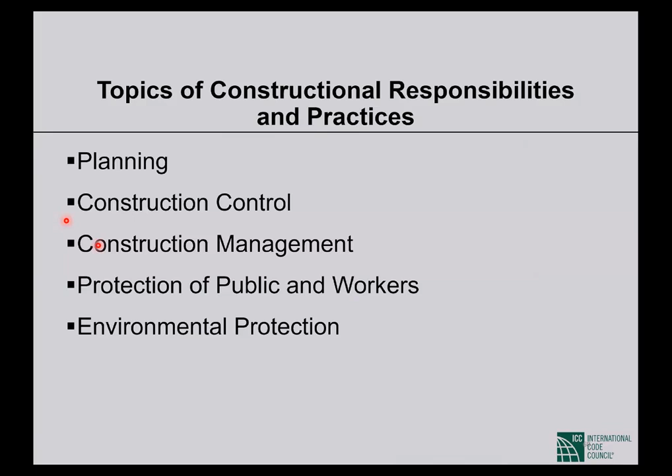The first chapter, constructional responsibilities and practices, has information regarding how to plan for a construction. What are the construction controls? How do you manage constructions? Protection of public and workers, and environmental protection - these topics are mentioned there. Planning, there are many things. I won't go into the details of that, but let me mention just one point.

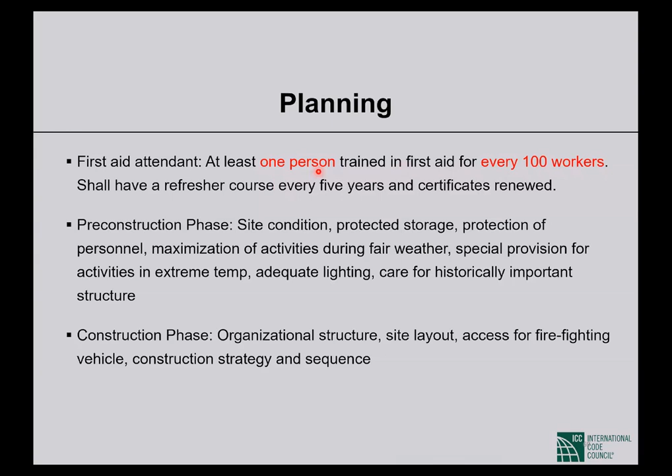First aid attendant - do you know the code requires that there should be at least one person trained in first aid for every 100 workers? And that person, not only should be trained, every 5 years he has to attend a refresher course. But we don't have that kind of training available, so we don't have this type of first aid attendant in our workforce, but that is required by the code.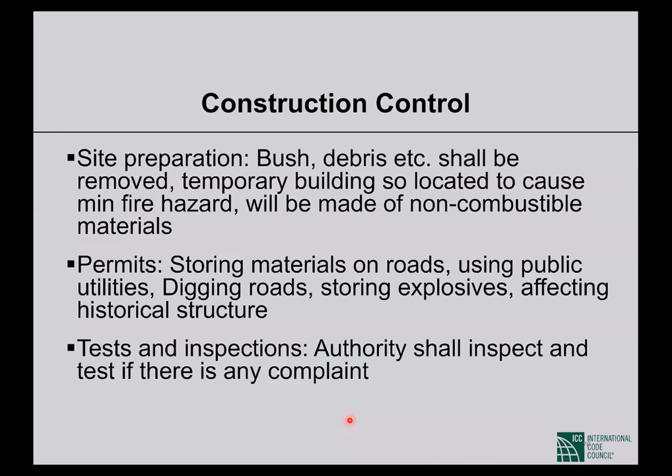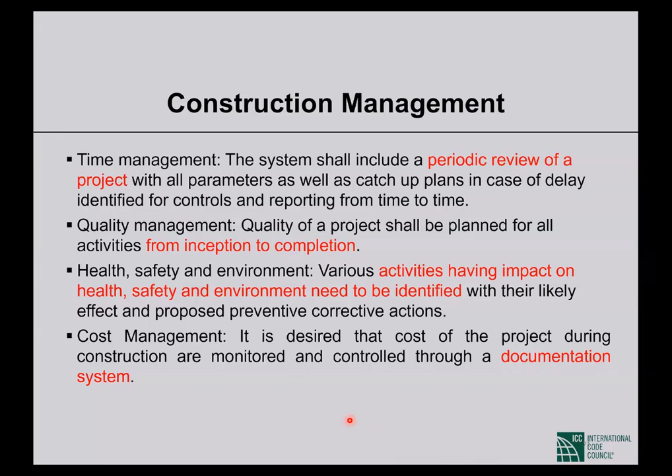Anyway, construction control - how to prepare site, what permits are required to start construction, what tests and inspections should be conducted - these things are mentioned. Construction management - time management, quality management, health, safety, environment management, and cost management. These aspects are mentioned in the code. A construction manager should understand them.

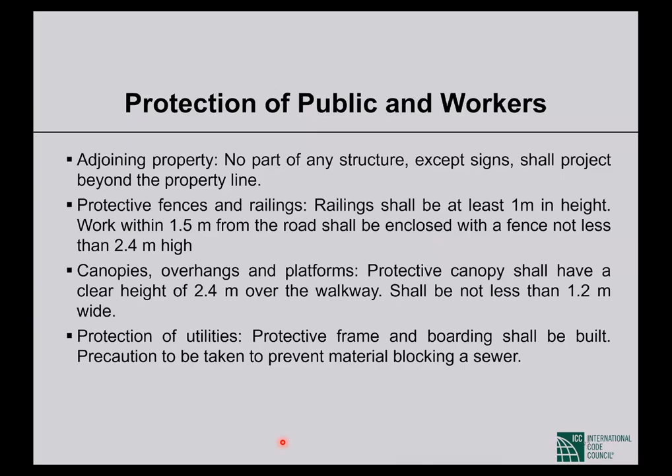Protection of public and workers - this is very detailed in the code, how to protect public and workers. There should be protective fence and railing. What should be the height of the railing? If your construction is just by the side of a road, what should be the height of the fence? Things like that. Many details are there. If you read this chapter, you'll understand all the details regarding safety in a construction site. Please go through them.

You have until 10:15, Dr. Rakib, not 10, so you have a little time. I see, really 10:15 or 9:15? 9:15, I mean, yeah, I'm sorry. So I have 15 minutes left. I'm going really fast, okay.

Protection of public and workers. Let's see how detailed it is. Use of road and footpath.

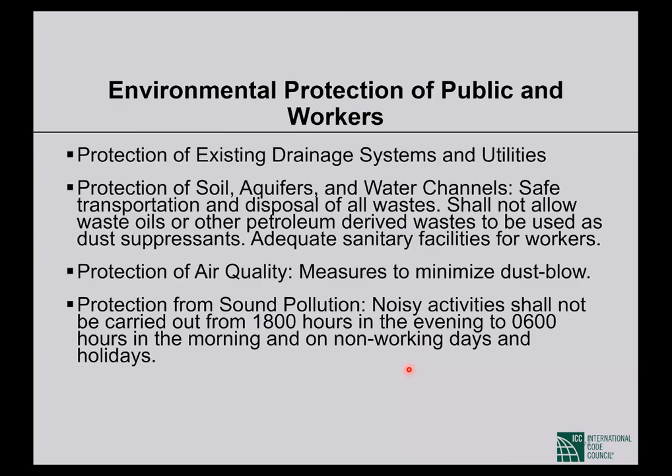Sound pollution - you cannot cause sound pollution and cause problems for others through your construction activities. Noisy activities shall not be carried out from 6 p.m. in the evening to 6 a.m. in the morning in residential areas. You cannot continue construction activities in the evening, in the very early morning, and on holidays. And there is a specific amount of noise, in terms of decibels, that is mentioned, up to which you can make sound.

Chapter 2 of this Part 7: storage, stacking and handling. This is also very detailed. I don't know how many of you know about this chapter. In this chapter, these topics are there. I want to specifically mention this classification - this is new, it was not there in the previous version. All materials are classified into 5 classes of materials.

Climatically sensitive materials like cement - if you put it in a moist condition, you cannot use it anymore. Durable materials like steel, brick, etc. are not that sensitive. Materials vulnerable to rough handling, like glass - if you handle that roughly, it will break. Inflammable and/or fire-sensitive materials like paints - paints are very, very inflammable, so they have to be stored very carefully. And hazardous materials, like materials that can cause health hazards such as acids or explosives, are classified into different classes. So how to store sensitive materials, hazardous materials, or inflammable materials - details are there in this chapter.

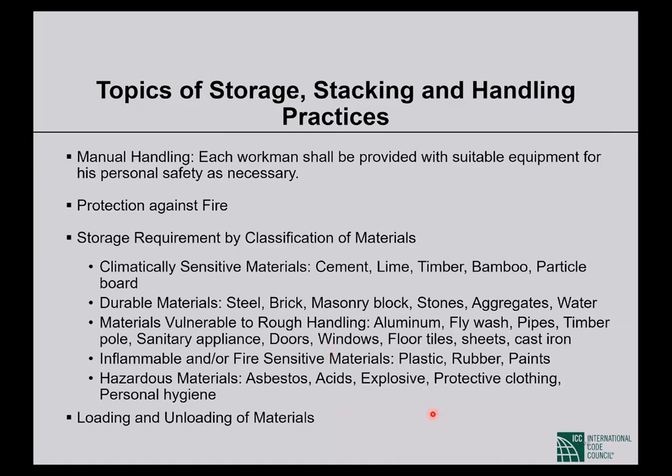So that's it. Safety during construction. This is interesting. So again, I'm saying that let's see how detailed the code is.

Helmets for workers. What do you think? The helmets used by workers at a construction site, and the helmets worn by motorbikers - are these types of helmets similar? No. And actually, there are specific standards for these helmets. For construction workers, the helmets have to follow these standards, BDS 1265, Bangladesh standard. And for motorbikers, there is a different standard.

Now you are quite familiar with the term PPE, personal protective equipment, because of COVID-19. You all know about PPE that are used in hospitals and by health workers. But for construction workers, the gloves, the goggles, the safety boots - these are PPEs. So the term PPE is very common in the construction sector, and by PPE we used to understand these things: helmets, gloves, goggles. So for all the PPEs, there are standards, and at the construction site, these standards should be followed.

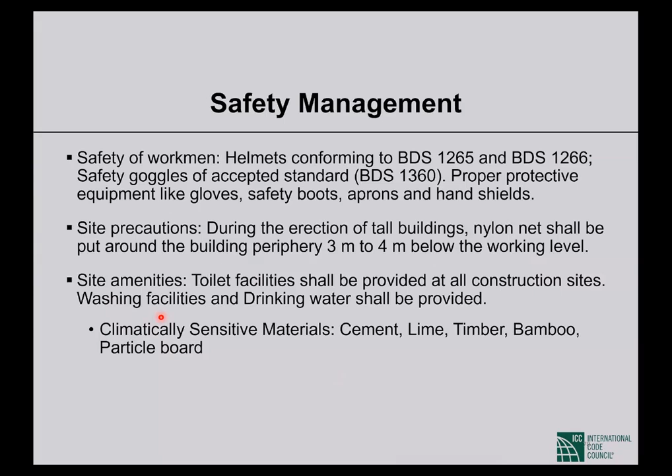Hygiene is very important for construction workers, so these have to be carefully considered while planning a construction site. And safety during construction - for all types of construction activities, what precautions should be taken are mentioned in these sections, like while excavating foundations, while driving piles, construction of walls, floors, concrete work, formwork, scaffold erection, and steel member erection operations, electrification.

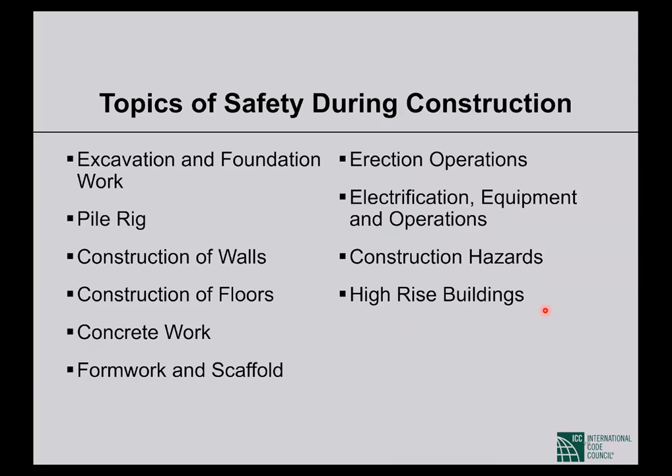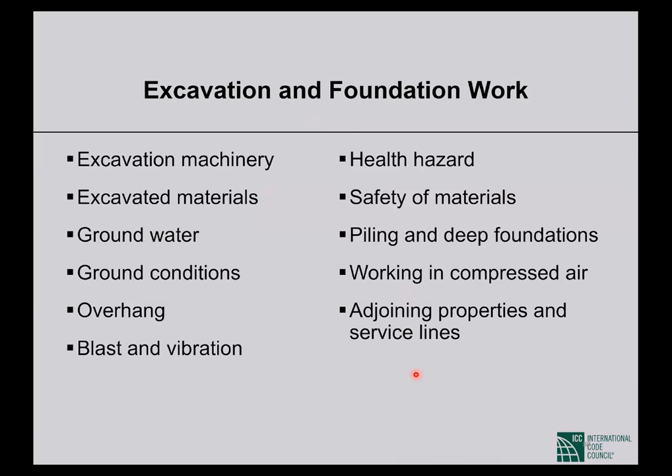This is a very common type of accident that happens at construction sites in Bangladesh. Many construction workers die every year because of electrocution. So the safety precautions that should be taken for electrical wiring are mentioned in detail in the code that should be followed, along with other construction hazards and specific requirements for high-rise buildings. I won't go into the details of these. For each of those construction activities, many more details are there, so I'll just skip them. Please read them in this chapter, in part 7.

Now, demolition work - this is chapter 4. You see, this is nothing new. This is similar to the previous version of the code. What are there? Precautions during demolition.

Detailed precautions are mentioned for blasting operations and the use of explosives. This was there in the previous code too, but unfortunately we still haven't used this kind of explosive demolition. We don't have this experience, but it is there in the code.

Lowering and removal and disposal of materials is very important. This is the reason why the Rana Plaza building collapsed. The debris after breaking walls, columns and shear walls was kept on the slab.

They were breaking those shear walls, cutting them from the bottom and putting them on the slab, then hammering and breaking them. There was a lot of debris accumulating on the slab.

The amount of load was much higher than the design load, and because the Rana Plaza building was a flat slab building, the flat slab collapsed.

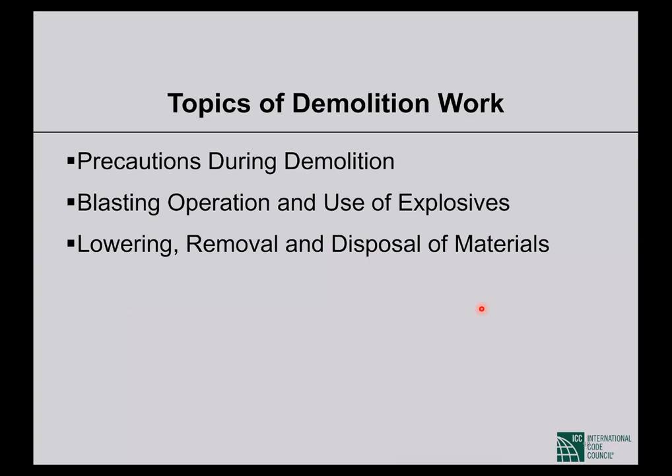Maintenance and management, repairs, retrofitting and strengthening of buildings. The topics mentioned in this chapter are building maintenance, access, records, and inspections. These are mostly administrative stuff.

There's some technical content on prevention of cracks, repairs, and seismic strengthening of buildings, but don't expect much from this title.

Although it is written as seismic strengthening of buildings, none of the modern concepts of seismic strengthening are mentioned in detail in this section.

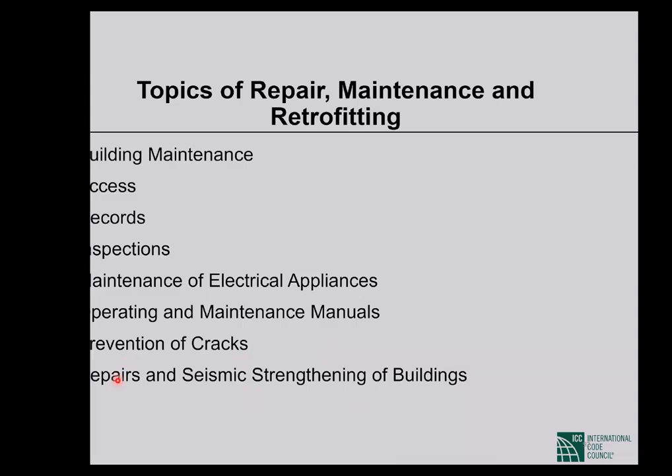So that's it. It's just 9:15, so I could finish in time, although I skipped many of the slides. Please pardon me for the haste that I made.

I just wanted to acquaint you with the different chapters and contents of the different chapters. That's all, thank you.

Thanks, Dr. Akib. No, that was good. The time was short for all the material you have.